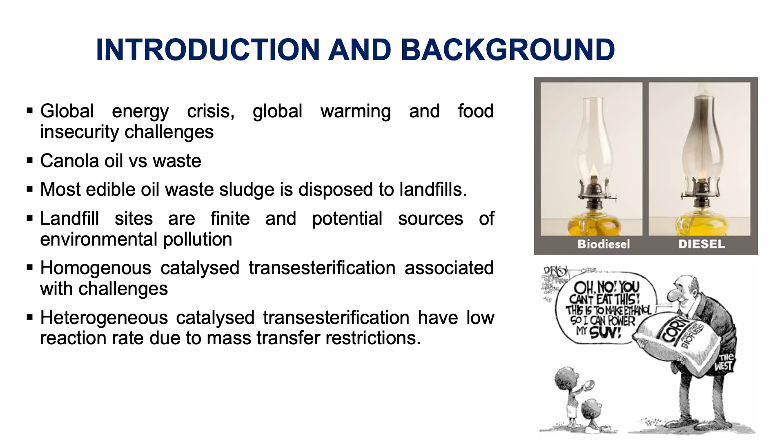Another associated challenge or bottleneck that deters commercialization of biodiesel production is catalysis. Conventional homogeneous catalysts such as sodium hydroxide often result in saponification when low-cost feedstocks are used for biodiesel production.

The wastewater sludge obtained from canola oil processing plants contains high concentrations of oil. In this study, it was therefore hypothesized that this sludge may be a suitable feedstock for biodiesel production, hence addressing the feedstock and availability challenge. This forms the aim of this study. The objectives were therefore to produce biodiesel from the wastewater sludge using heterogeneous catalyst. The catalyst used was obtained from mineral processing waste.

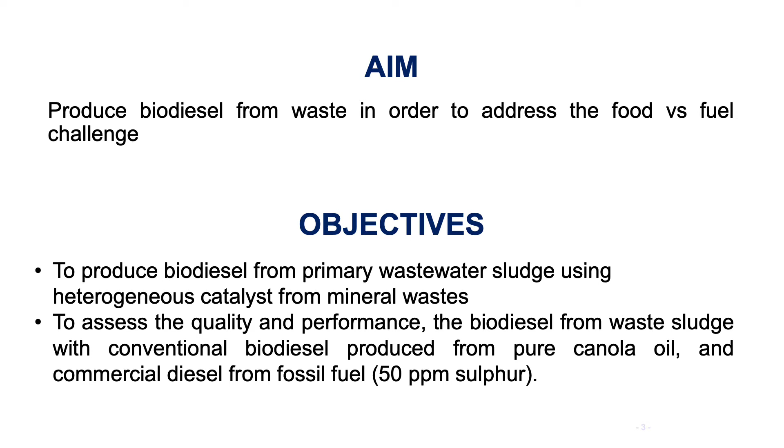After producing the biodiesel from the wastewater, these were then compared with biodiesel from pure canola oil and commercial petrol diesel, as the performance and the quality were assessed for these biodiesel and diesel products. In order to achieve the objectives, transesterification method was employed for the biodiesel production. This was mediated by heterogeneous catalysis at optimum reaction conditions. The quality of the prepared biodiesel samples was tested in accordance with the ASTM methods.

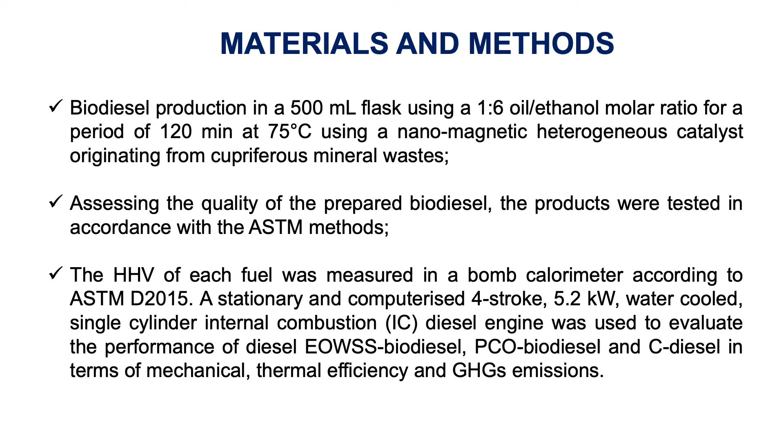Their performance was tested in a stationary and computerized 4-stroke 5.2 kilowatt water-cooled single-cylinder internal combustion diesel engine in terms of mechanical and thermal efficiency and greenhouse gas emissions. The greenhouse gases that were focused on were carbon monoxide and nitrogen oxides.

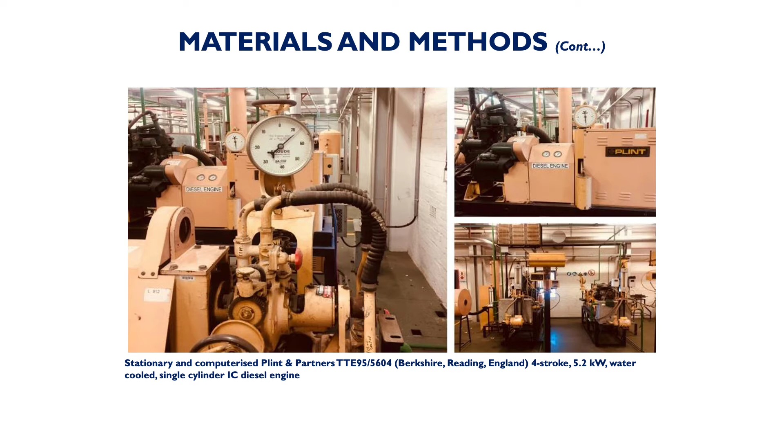Results and discussion. For the selected thermophysical parameters measured in this study, it was clear that both the edible oil wastewater sludge biodiesel and pure canola oil biodiesel were comparable to the commercial diesel in terms of the quality. The parameters largely fell within the ranges specified by the relevant ASTM standards as shown on the table. If you look at the viscosity, the density, the HHV, and flash point values, you see that these are comparable for the biodiesel samples and the commercial diesel.

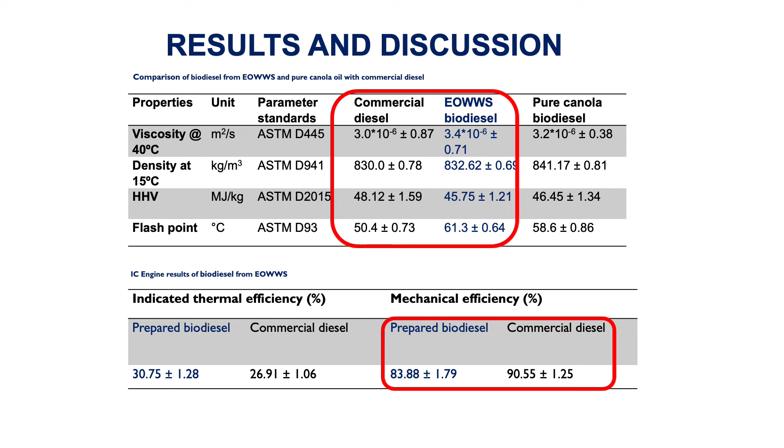Furthermore, the mechanical efficiency and the thermal efficiency were also comparable for the biodiesel samples and the commercial petrol diesel sample. If you look at this figure here, we'll see that the specific fuel consumption for the commercial diesel was lower than that of the pure canola oil biodiesel and the edible oil wastewater sludge biodiesel. And these were within the range of brake power outputs applied, that is 2.1 to 12.8 kilowatts.

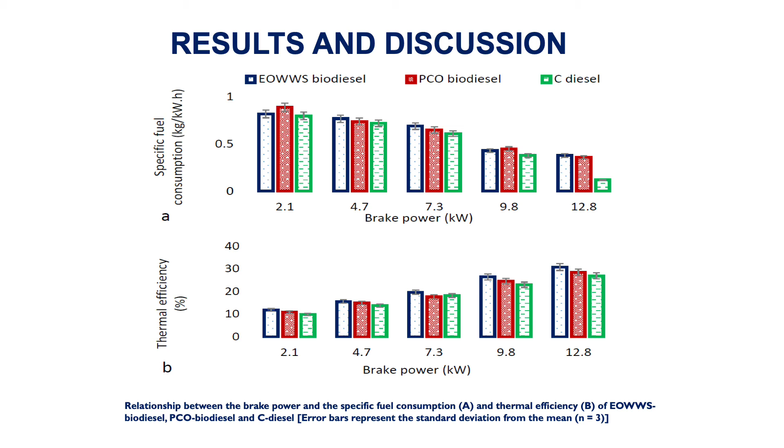The commercial diesel performed notably better at higher brake power. If you look at this, we'll see that at higher brake power, the commercial diesel performed better. As engine speed increases, fuel combustion improves. This is due to more efficient mixing of fuel and air. In this study, the engine was operated for the same duration and under the same load for each of the fuels tested. So emission changes were assessed using the engine speed.

Combustion of biodiesel typically results in higher NOx emissions in comparison to petroleum diesel. However, for the current study, the measured emissions for all fuels decrease almost linearly with an increase in engine speed within the range tested. Further, the test engine emitted remarkably lower nitrogen oxides when operated with either the edible oil wastewater sludge biodiesel or the pure canola oil biodiesel in comparison with the commercial diesel.

In most cases, lower carbon monoxide was also emitted when the engine was operated with the biodiesel samples as compared to the commercial diesel sample.

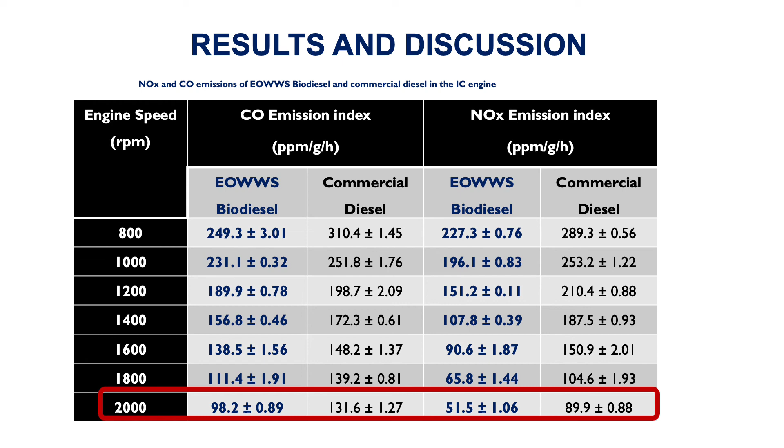In conclusion, edible oil wastewater sludge proved to be a suitable feedstock for biodiesel production. Hence, this can be used in conjunction with oil seeds as feedstock for in situ biodiesel production in edible oil facilities. Overall, in terms of the performance and the quality, the biodiesel samples were comparable with that of the commercial diesel.

Hence, the biodiesel can either be used alone or blended with commercial diesel, and this promises to have positive financial and environmental impact for the transport and energy industry.